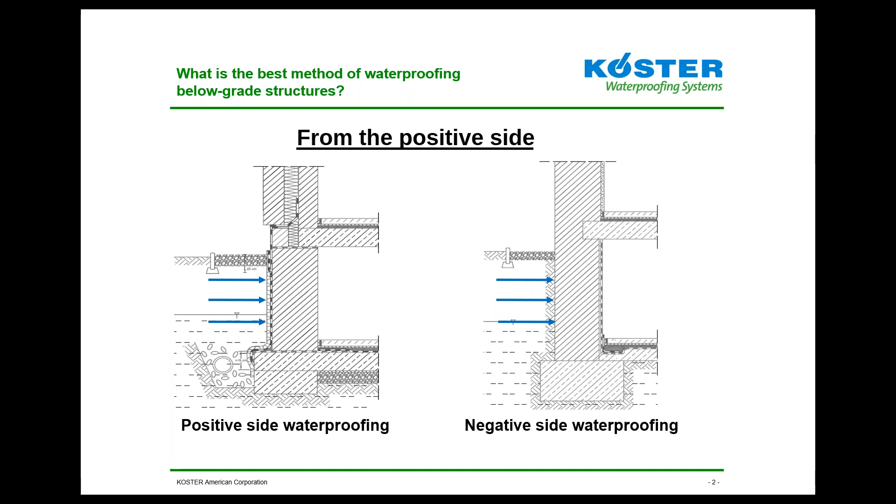The first question that's always asked in terms of waterproofing below grade structures is what's the best method? The best method is normally to waterproof from the positive side, meaning the side directly exposed to the water source. This diagram shows the difference between the positive side of a structure and the negative side. The primary reason waterproofing from the positive side is most effective is the ability to visually see the installation and ensure the wall has been waterproofed correctly before backfill is installed.

Most positive side waterproofing coatings can afford to be a little more elastic and flexible to bridge any cracks which form, where most negative side waterproofing coatings are usually more rigid with high compressive strength. So positive side coatings can be installed with a bit of flexibility in case of potential movement of the building, which could cause cracks in the structure.

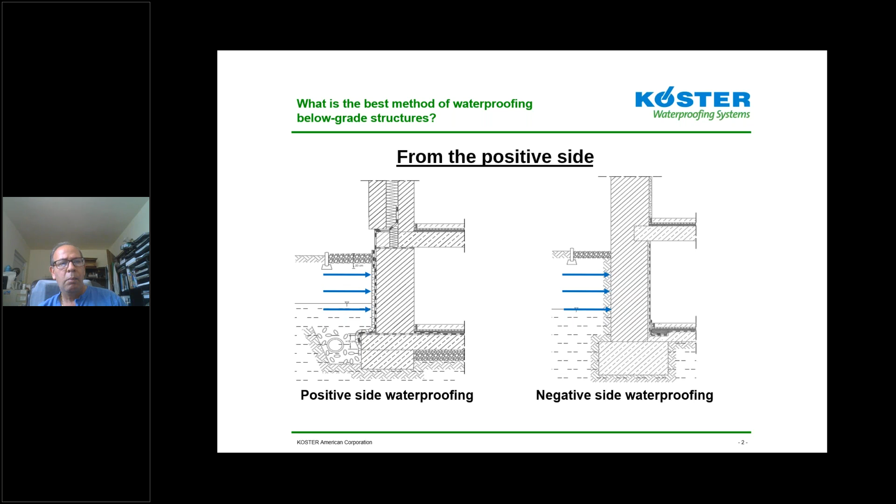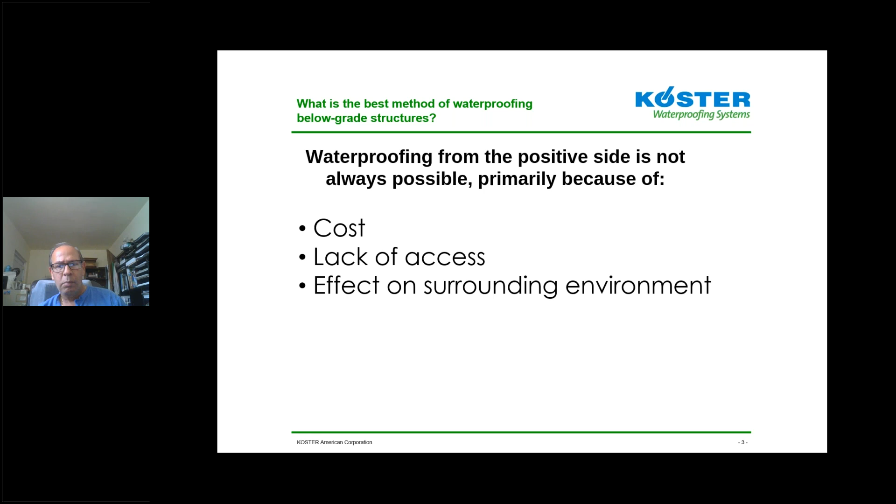However, waterproofing from the positive side on existing structures is very rarely a feasible option for several reasons. Primarily, there's the substantial cost associated with excavating around a below grade structure to expose the exterior. It's also often impossible to get to areas of concern because of neighboring buildings, roads, or other obstacles in the vicinity. Finally, the effect on surrounding areas must be considered, such as the closing of roads and the impact on the local community and area around the project.

The goal of any project is to perform the work for as low a cost as possible, in as short a time as possible, with as little disturbance to the surrounding area and community as possible. Most of the time, these factors prevent waterproofing from being installed on the exterior of existing below grade structures because of the lack of feasibility to expose the outside.

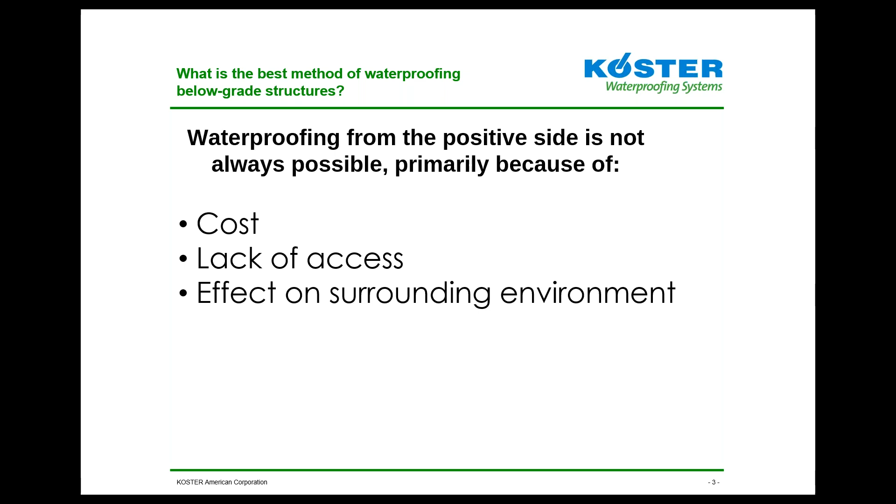So what do we do in that case? We have systems to install as part of negative side coating systems. Primarily what we install in these scenarios is negative side waterproofing by curtain injection, or blindside injection through the wall. This is where negative side waterproofing comes into play. These systems are installed from the inside of a below grade structure, eliminating the need to expose the exterior.

One of the most well-proven methods of waterproofing from the negative side is by injection, also called blindside injection. This is most commonly performed by curtain wall injection, but it can also be achieved by area injection into the structure or by injecting waterproofing material into leaking joints.

A common misconception of negative side waterproofing is the thought that one installation in one leaking area will stop the problem permanently. Injection materials, especially blindside curtain wall grouting materials, don't simply make the water disappear. They provide a waterproof seal in that specific area where they're installed. As we all know, water follows the path of least resistance, so if injection is used in distressed or leaking areas, it's very possible the water will move and cause distress in other areas. When using these products solely in isolated areas, it's important to manage the customer's expectations, meaning several installations may be necessary over isolated areas to monitor the movement of water and ensure a completely waterproof structure.

Blindside injection, like we discussed, is normally used as part of a system with other negative side waterproofing approaches, including crack injection and cementitious negative side waterproofing coatings, as part of what we'd call a belt and suspenders systems approach to completely seal the area.

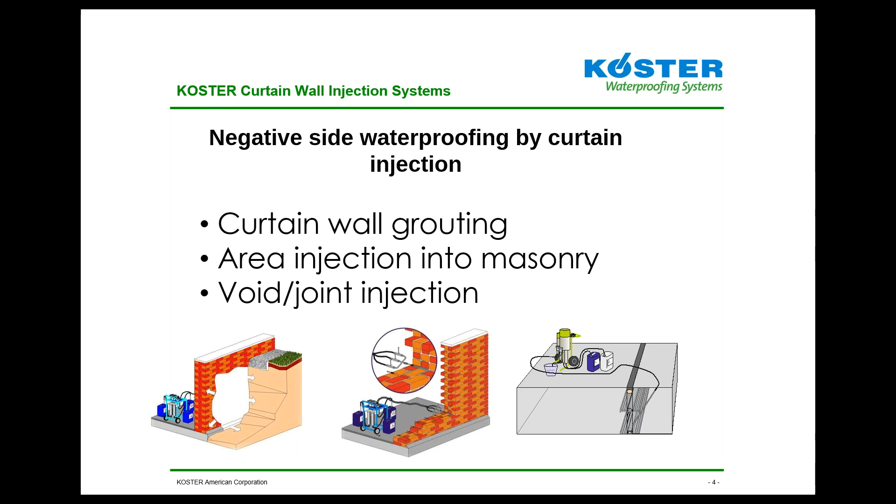Curtain wall grouting is the most commonly used method of blindside injection and negative side injection waterproofing. It's a process where injection material is installed into the ground on the outside of a structure. The grout is pressure injected directly into the soil through ports installed through the entire thickness of the wall. The ports are closely spaced to ensure material flowing from each port overlaps with the next, creating a continuous curtain along the outside of the structure.

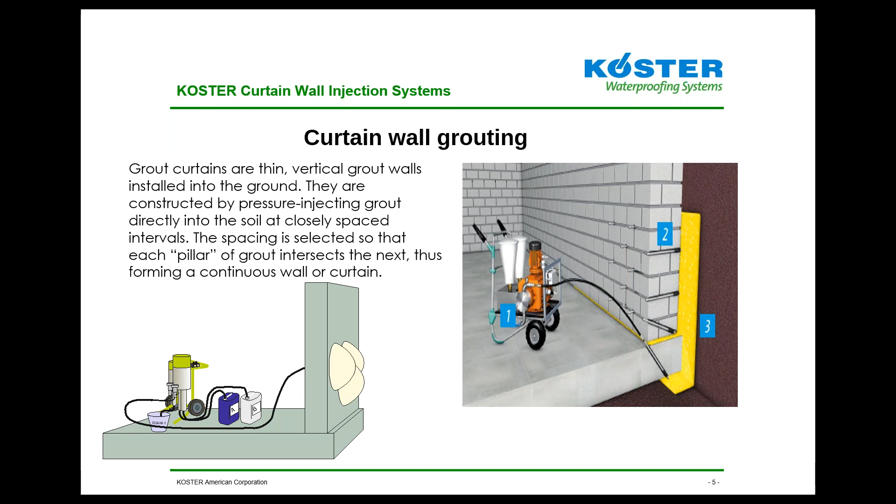As shown in the graphic, material injected through each port forms a grout ball, which should overlap with the balls of material injected through adjacent ports. Oftentimes ports are left open during injection to ensure travel of material along the outside of the wall. These curtains are elastic to ensure coverage in case of future cracking in the structure and are highly chemical resistant.

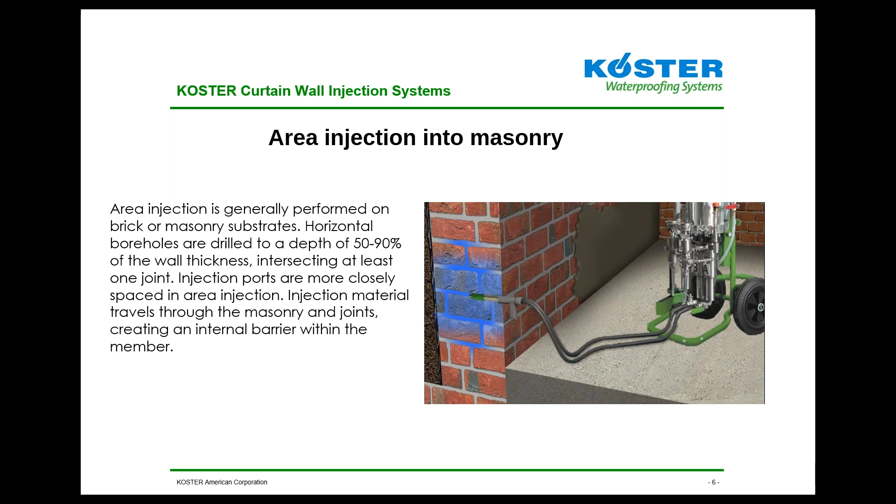Area injection is usually performed on more porous substrates like brick or some kinds of masonry. Holes are drilled at very close proximity to each other to a depth of about half to 90% of the thickness of the wall. A low viscosity injection material is pressure injected into the ports. The low viscosity of the grout allows it to travel through the pores and capillaries of the masonry, as well as through the mortar joints. This creates an internal waterproofing barrier within the wall itself.

Finally, the third common application for negative side injection is for void and joint filling. This is most commonly performed in leaking expansion joints, both vertical and horizontal joints. When injecting into a joint, one of two methods are used. The most common method is to perform the work like a normal crack injection, drilling ports on alternating sides of the joint. Material is normally injected behind the existing water stop or waterproofing if there is one present. The other method is to use surface-mounted injection ports, which do not require drilling into the substrate.

When injecting overhead vertical joints or horizontal joints, some kind of surface seal or surface sealing material must be installed to retain the material. In an overhead joint or a vertical joint, we don't want that material flowing out of the joint. We want it to be kept in the wall, so we need to have some kind of surface seal present to retain the material in the void.

Void filling is performed similarly, with grout used just to fill void spaces and create a waterproof barrier. This is most common at interstitial spaces between inner and outer walls, around tunnel walls, and other applications where interstitial spaces may be present. These are sometimes filled with foam products as well, but void filling with foam is not as long-lasting of an approach in a system.

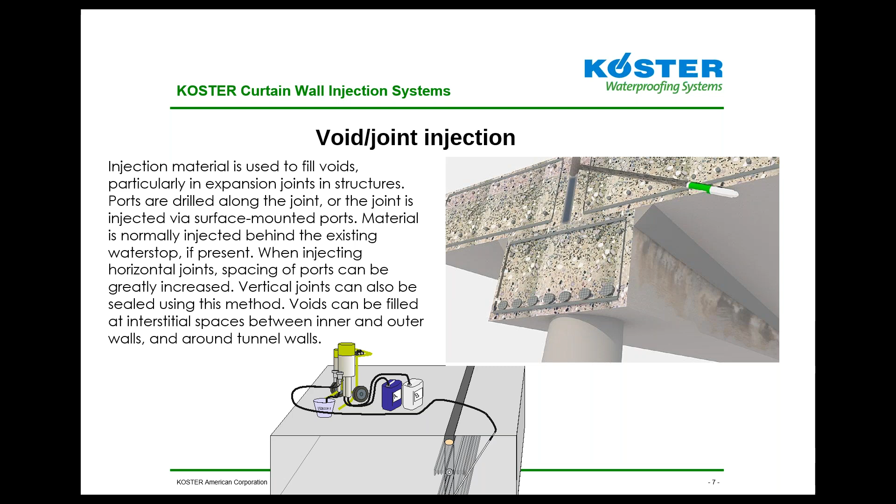Foams do tend to break down much more quickly, over a relatively short lifespan compared to these injection grouts and injection materials that are designed to have much longer lifespans and aren't affected as much as polyurethane foams may be.

Injection grouting materials of the past included clay, cement, and bentonites, which were not particularly chemical resistant as some products which are manufactured today. Cementitious products are by nature very rigid and are susceptible to cracking over time, which could allow further breaches of the system.

Altogether, these products created the need for flexible, polymer-based systems which are highly functional and much more long-lasting. Polymer grouts, which are flexible, elastic, and highly chemical resistant, are the ideal products to use for negative side curtain injection. The systems that KOSTER provides that we're going to focus on are polyurethane gels and acrylate gels. A gel is a state of matter between a liquid and a solid, and these gels provide excellent retraction, elasticity, and flexibility among multiple other important physical properties.

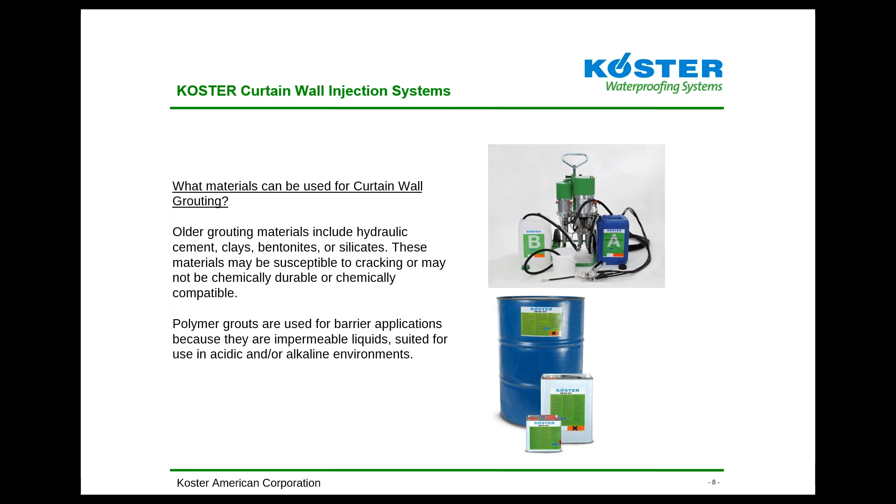Polyurethane gels have been the workhorse in terms of void injection and curtain injection for a very long time, and for good reason. They're highly chemical resistant and very elastic systems which provide ideal physical characteristics for a long-term successful installation. Polyurethane gels are typically one component mixed with water during injection.

They're usually installed through a two-component pump with a variable mixing ratio, which allows the material to be mixed with water at ratios from 1:1 all the way to 1 to 13 parts gel to parts water. So that would be 1 part gel up to 13 parts water. Changes in the amount of water mixed in the ratio will change the viscosity, reaction time, and penetration range of the mixed material. The mixing ratio can also be adjusted case by case depending on the amount of water present behind the wall, as the gel will use water present behind the wall as part of the reaction after injection.

Viscosity of the material ranges between 600 and 800 centipoise depending on temperature, which is similar to castor oil or glycerin.

When injected, depending on the mixing ratio, the viscosity can be as low as 20 centipoise. That would be at 1 part gel to 13 parts water, giving a viscosity of close to 20 CPS. Water has a viscosity of about 1 centipoise, so this is fairly low viscosity relative to other products.

Time of reaction, depending on the mixing ratio, is between 1.5 minutes and 3 minutes. Since it's mixed with water, application temperature must be above freezing. When installing at temperatures below 50 Fahrenheit or 10 Celsius, it's important to take into account the effect the temperature will have not only on the viscosity of the material being injected, but also on the reaction time. Very low temperatures will affect reaction time, and materials will take longer to react at lower temperatures.

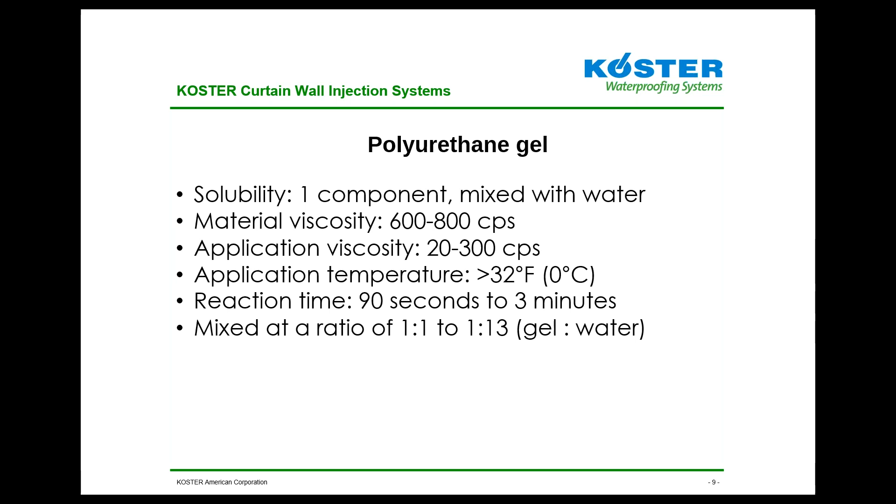KOSTER's polyurethane injection product is the KOSTER Pur Gel, normally installed with the two-component KOSTER Gel Pump. The KOSTER Gel Pump is ideal for injecting this product. It's easily adjustable to change the mixing ratio of water to gel, allowing for quick changes to the injected material's physical characteristics based on field conditions and installation conditions.

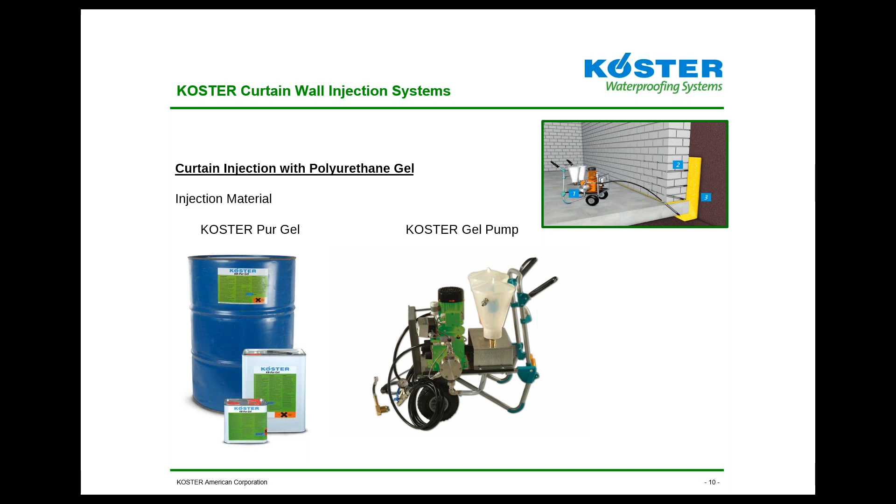So if it's noticed that there is a large amount of water behind the wall and you want to turn that ratio down to encourage the material to mix and react with the water present behind the wall, it's very simple to make those changes on the job site with very little downtime.

Acrylate gels are fairly new in the world of curtain injection, but are great products with excellent tear resistance and elongation properties among other properties that make them highly functional and well suited for these installations. These products are typically 3 components: a methacrylate mixed with an acrylamide to form the A component, and a sodium or ammonium persulfate mixed with water to form the catalyst, or the B component.

In the case of joint injection, the water is usually replaced with the polymer dispersion because the dispersion greatly increases the tear resistance and bond strength of the material. Viscosity of the material when injected is about 4 centipoise, and when the polymer emulsion used in joint injection primarily is applied, the viscosity changes to about 30 centipoise. The low viscosity allows for much longer travel of material and excellent penetration into tighter voids.

These products are mixed at a 1-to-1 ratio of A to B, but the ratio of salt or acrylamide can be adjusted to create a variable reaction speed. Reaction times can vary from about 20 seconds to 15 minutes depending on the product used and the ratio of components added. Shorter reaction times are ideal for active leaks and for preventing excessive runoff in looser substrates or soils. Longer reaction time allows for deep penetration before reaction, giving the material a chance to spread through the matrix behind the wall and form the desired curtain.

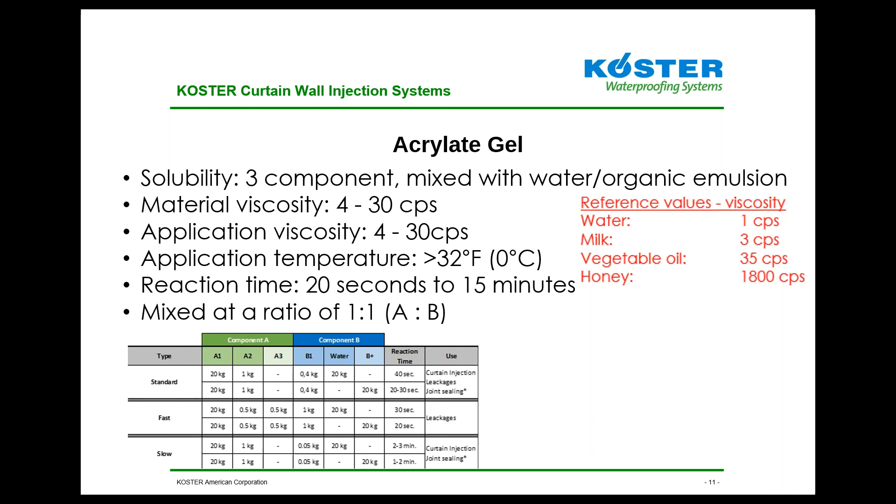KOSTER G4 is the all-purpose acrylate injection gel with a very low viscosity and 15-minute reaction time, which allows for significant penetration into substrates and soils. The A1 component is combined with the A2 component, and the B is added with 5 gallons of water, so the material is injected at that 1-to-1 ratio by volume.

KOSTER S4 is a product designed with an adjustable reaction time from 20 seconds to about 3 minutes, which allows for faster reaction in conditions where active leaks may be present. The same installation procedure can be followed, but KOSTER S4 can also be used with the B+ additive, that polymer emulsion discussed earlier, which increases elasticity, retraction, and bond strength, as well as elongation.

B+ additive replaces either some of the mixing water or all 5 gallons of the mixing water in the reaction. Different amounts of B+ added will affect the reaction time of the mixed product. This is most commonly used in joint sealing applications.

The KOSTER Acrylic Gel Pump is a pneumatic pump specifically designed for use with these products. It pumps both A and B components at a 1-to-1 ratio. Material is pumped separately and only mixes at the distribution nozzle. There's also an internal flush, which can be used port to port to clean the mixing head.

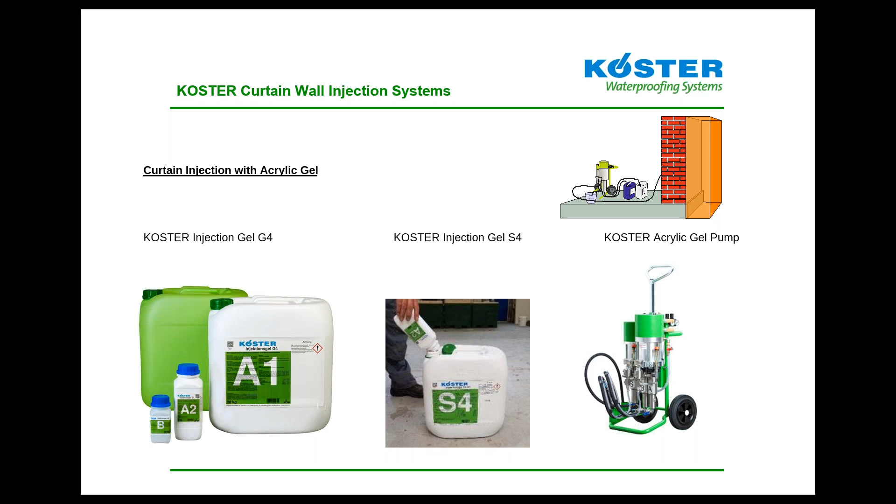The pump has an internal flush, which can be used port to port to clean the mixing head and nozzle, ensuring that mixed material does not react or cause a reaction in the mixing head. Since neither component will react with plain water, the pump can be flushed and cleaned with water, so there's no need for any harsh chemicals or solvents to clean these pumps.

Injection ports are drilled in a diamond pattern with standard spacing of about 10 to 12 inches. Injection is performed from bottom to top, moving upwards and following the grid pattern. A rule of thumb is approximately 40 strokes of the pump per port, done in several different stages, which ends up being about half a gallon of material per port. This is just a rule of thumb; different job and installation conditions will obviously make that vary, but it's a good place to start.

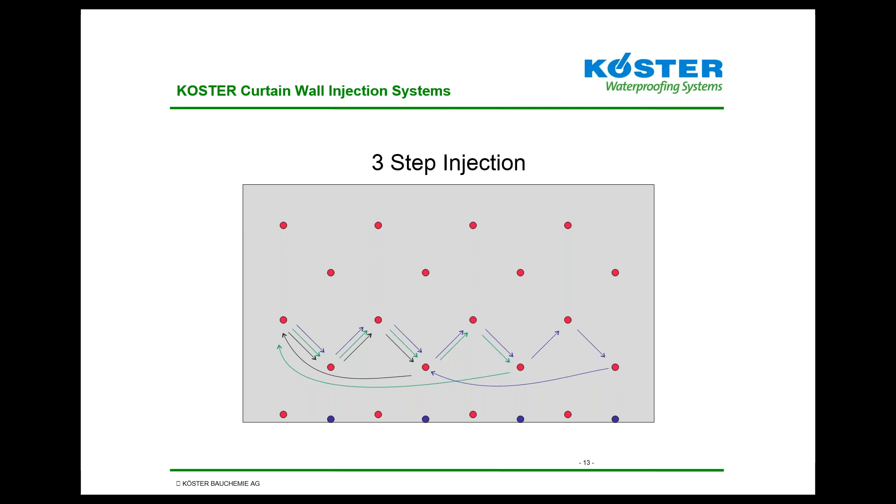Material is injected in overlapping phases to ensure full coverage of the curtain along the backside of the wall. Working from bottom to top creates what we call the shingle effect, where grout is installed on top of other grouted areas, overlapping from the top and filling voids as it settles and reacts. The material settles as it's injected over material that's already reacted, filling any voids it comes into contact with, creating that shingle effect and giving us a seamless installation. Here's an example of a standard installation. During normal installation, we'd start at the bottom, and with our grout ball, we're injecting phase by phase to ensure overlapping and a curtain of material along the backside of the wall.

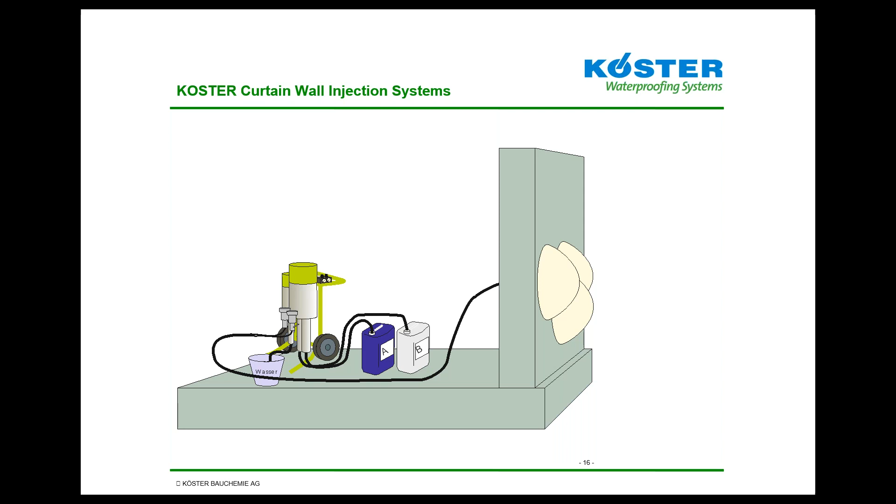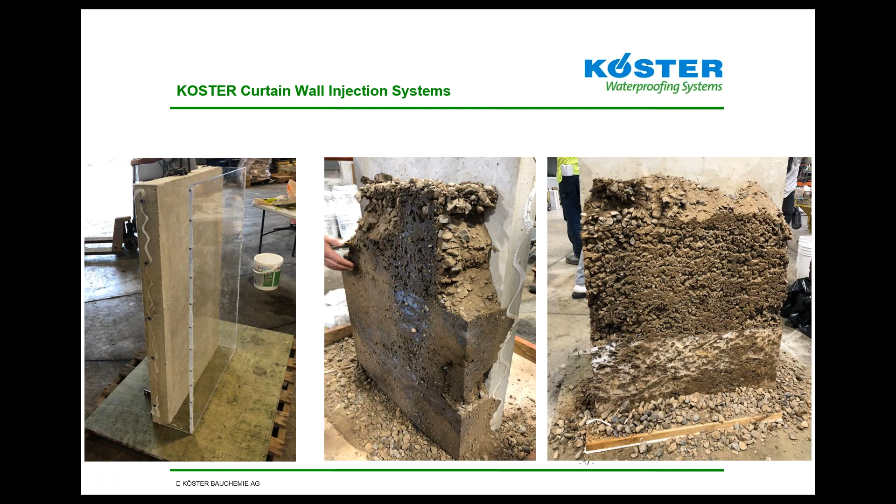Again, what we're looking for here—we have more pictures later on of those grout balls, those circular shapes which can be formed by the injection material as it's injected. In the real world, though, this injection material, especially since it's low viscosity, behaves like water and follows the path of least resistance, filling voids along the way. So we don't always get those ideal, perfect grout balls. But as you can see here, we've pulled the plexiglass back, and we have a solid wall where the material has consolidated any voids and reacted, giving us that waterproofing barrier we're looking for.

This brings us to our big question: on any particular project, which material should you use? Both types of products have adjustable mixing ratios, allowing the user to shorten or extend curing time depending on project conditions. Both can be used in active leaking situations, and both use water present in the injection area as part of their reaction and curing. Especially the acrylate products, the G4 and S4, if they encounter water behind the wall as they're reacting, they can use water outside that 1-to-1 ratio, and can swell with exposure to water after curing. So even after it's cured, if exposed to water on the backside, it can swell and expand, creating an even better waterproofing barrier even after the product has finished curing.

Acrylates are generally better at penetrating through water immediately after injection, based on a chemical compound which allows the material to cut through water, preventing it from being washed away as easily in a situation with moving water behind the wall or an active leak.

The higher viscosity of the polyurethanes means less penetration generally into substrate voids and soils. This means polyurethanes are generally less effective in soil stabilization, but it also means the material often cures in place without the risk of the gel traveling too far before the reaction begins.

With their low viscosity, acrylates penetrate better into soils during injection and allow for more travel in both horizontal and vertical applications. The adjustable reaction times of these products, down to as little as 20 seconds, allow them to be injected to cure in place as well as traveling and penetrating.

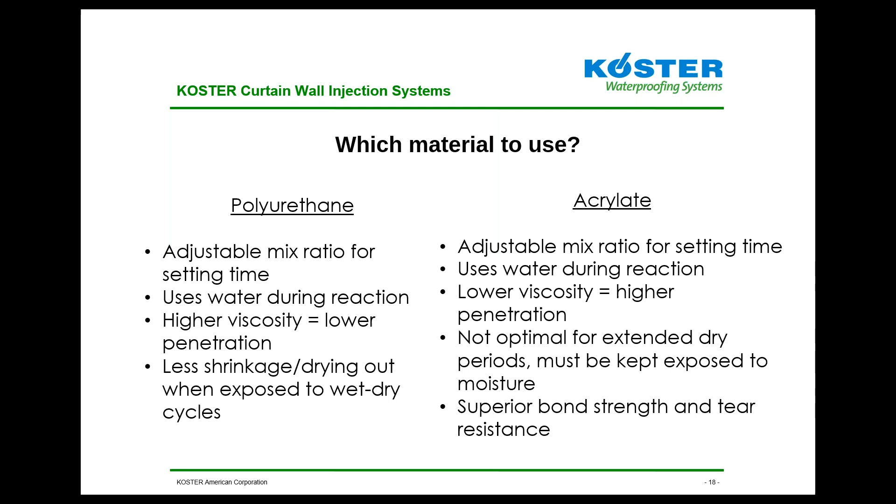For a long time, polyurethanes were the top dog of curtain wall grouting because of their impermeability and resistance to chemical exposure in alkaline or acidic environments. These products won't break down over time, and they offer the potential while injecting to alter the mixing ratio to speed up the setting time in situations where lots of flowing water is present.

Since their introduction, acrylates are obviously also very commonly used in circumstances where tight soils and low viscosity is required to penetrate into any tight soils without voids, and for the curtain of grout that is desired. By changing the mixing ratio of the three components, the reaction time of the product can be altered down to 20 seconds to stop active leaks or to prevent runoff of the material in loose soils.

When using acrylates, again, care must be taken to ensure that the material will not be allowed to permanently dry out and will have some source of moisture.

The picture on the bottom left is a polyurethane injection that we did, just a sample mock-up with the pure gel, and you can see how that material, based on the viscosity, doesn't really penetrate and fall like water will, but we get those grout balls and we get the formation along the backside of the wall, which is exactly what we're looking for.

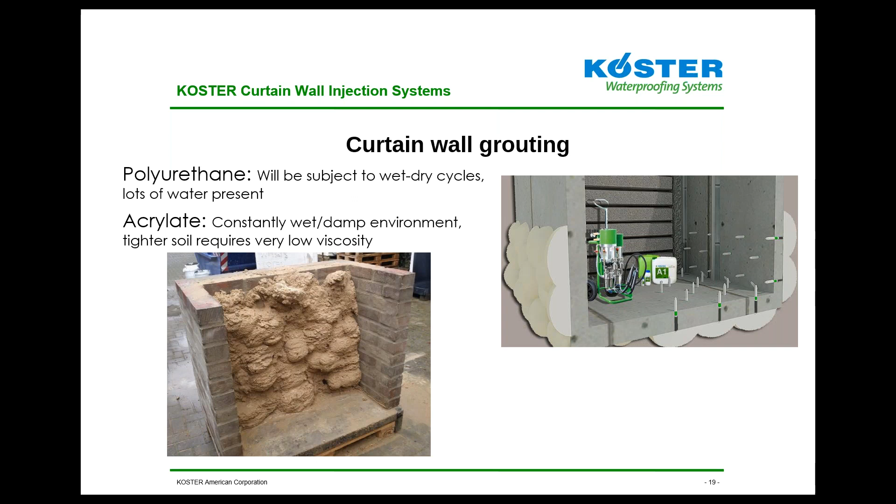For area injection, acrylates are always chosen over polyurethane products. Low viscosity of the material allows the acrylate to penetrate into the finest pores, voids, capillaries in the masonry and in mortar joints, which flows and creates a barrier.

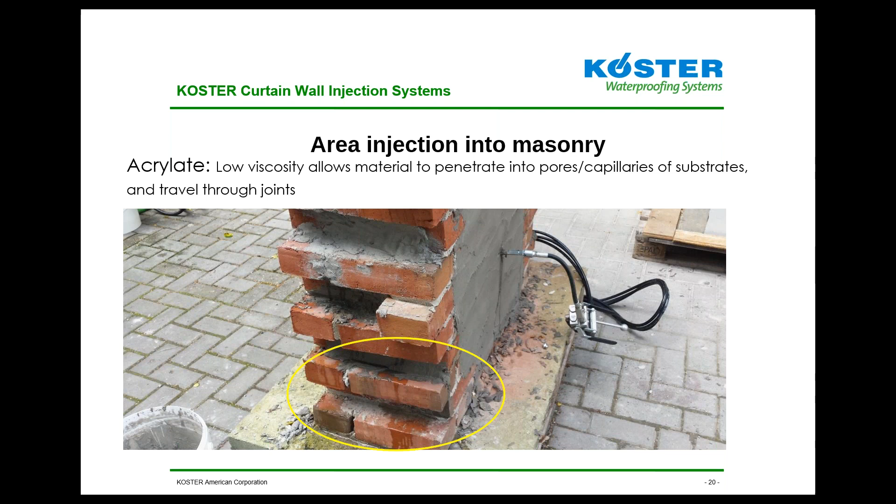Towards the bottom of the picture here, you can see the acrylate material running out of the sides of the prop with the injection port about 1.5 feet away. So you can see that material is so low viscosity, and when it's pressure injected, you can see how it flows through every single capillary and void and creates that barrier within the substrate.

In the application of joint injection, both products offer viable options. Polyurethane gels offer good elongation and good bond strength to flanks of joints, but the performance of acrylates in terms of elongation, bond strength, and tear resistance are much, much higher.

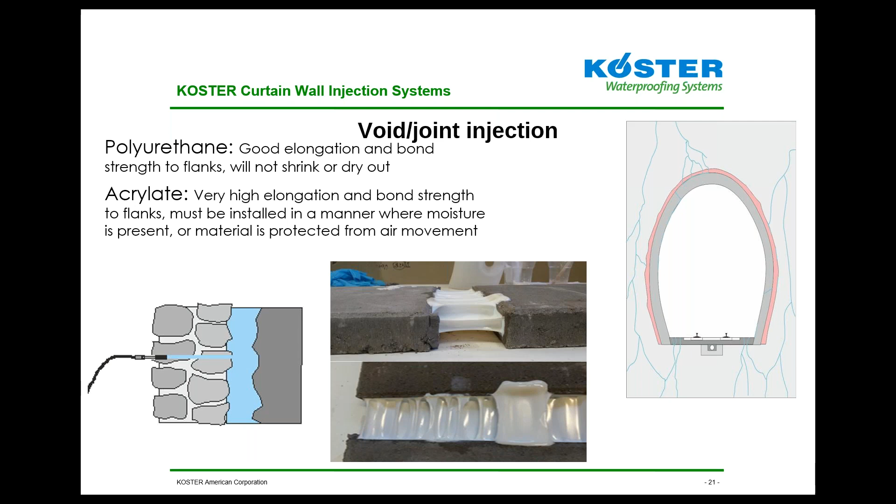Pictures along the bottom in the middle of the slide are of the KOSTER S4 used with the B+ polymer emulsion dispersion to increase the elongation and bond strength of the material.

As a case study, we're going to discuss the project we worked on, the West and South Foundation walls at the Empire State Building in New York. In 2014, we provided materials for a waterproofing project in the basement of the Empire State Building, specifically curtain injection of the West and South Foundation walls of the basement. The owners wanted to use these areas as office space, and they'd never been used or occupied in their existence.

Based on drawings and scans of the walls, it was determined that the foundation walls, which were constructed in 1930, were constructed of brick, an average of 36 wythes thick, so that's about 12 feet thick, with some concrete footings. Because the building was constructed on bedrock, the thickness of the walls varied greatly over their length. Additionally, the elevation changes in the bedrock made it difficult to determine a good place to inject material behind the wall.

Finally, with so thick of a wall, it would have been very hard to deposit material on the outside, never mind the fact that active water along the backside of the wall, which is part of many of the island of Manhattan's underground rivers, would have made it very difficult to ensure that material was forming this monolithic curtain along the backside of the wall.

Normally, the method of ensuring travel of materials is to leave adjacent ports open during injection. When material is seen coming out of an adjacent port, it means that material has made it as far as that next or adjacent port. In this scenario, obviously what we're dealing with in this project, it would have been impossible to expect material to be pushed back through the wall out of an open injection port.

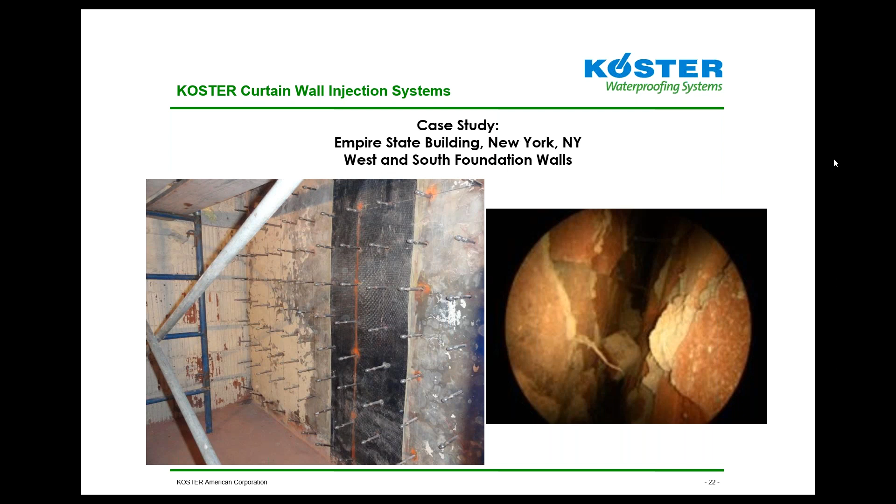The entire waterproofing system of these areas utilized many products prevalent in negative side waterproofing, again, including waterproof repair mortars, polyurethane crack injection foams, and crystalline negative side waterproofing to create an entire systems approach, a waterproofing system from curtain wall and injection waterproofing all the way to a negative side capillary crystalline coating. Several years later, these spaces are occupied and they remain waterproof to this day.